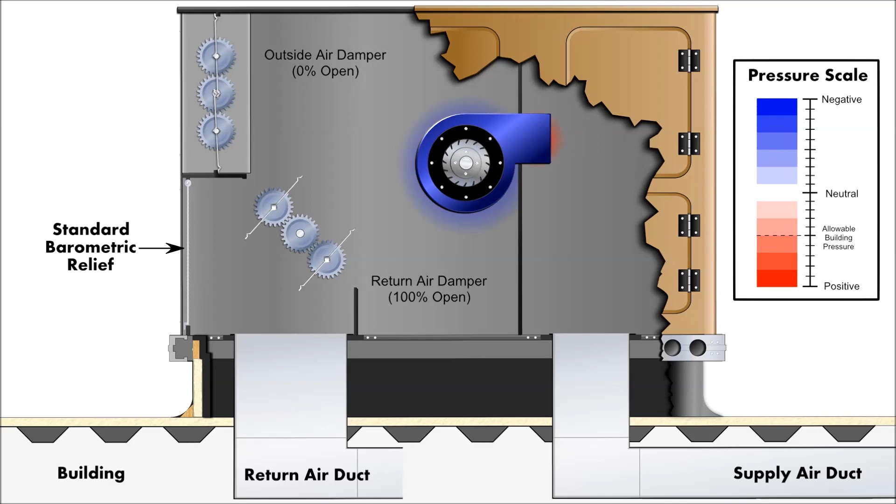To fully see this in operation, the following is a simulation of a typical rooftop with a standard economizer and integrated barometric relief dampers. As you can see, the unit starts out with the economizer outdoor air dampers fully closed and the return air damper open 100%. Also note the standard barometric shown on the left side. In putting the unit in operation, you will see the red section being supply air or positive pressure and the blue being return air or negative pressure.

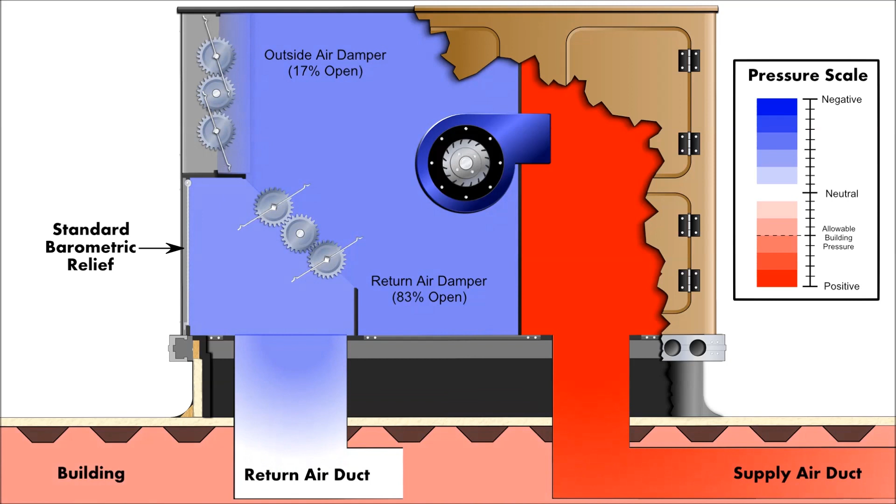At low outdoor airflows, the return air ductwork and the supply fan creates a negative pressure in the unit's relief plenum. This prevents the barometric relief damper from opening, regardless of the damper size. Today, a common solution to overcome this negative pressure is the use of an additional power exhaust device. Although power exhausts are suitable in many applications, power exhausts in general are an additional cost in both equipment and possible wire sizing. Plus, they can generate noise and waste energy.

As the economizer outdoor air damper opens and the return air damper closes, as shown here, you can see the building can become overpressurized at relatively low outdoor airflows since the relief damper has not opened yet. But as the economizer outside air damper continues to open and the return air damper continues to close, the return air duct is now sufficiently isolated from the effects of the supply fan and the pressure in the return air duct has become more positive. These changes create a positive pressure in the relief plenum, which allows the barometric relief damper to open. Again, depending on the application, barometric relief may not occur at low outdoor airflow settings.

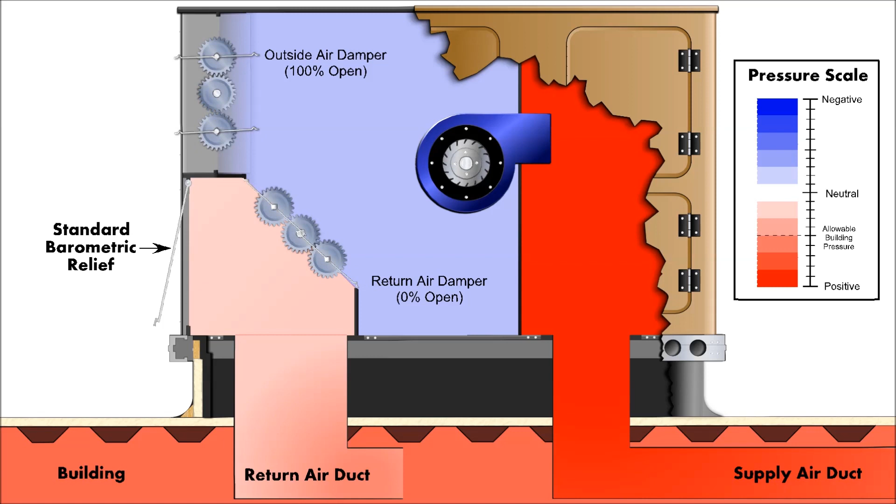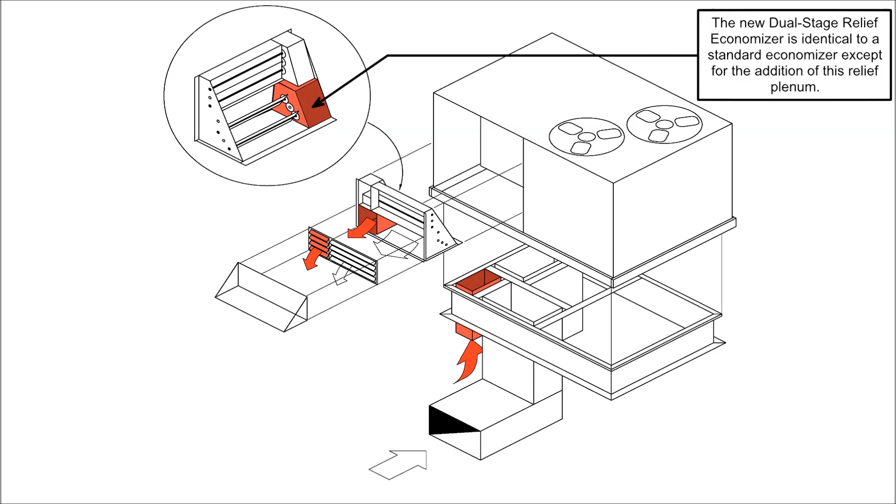To remedy this potential situation, Carrier's new dual-stage relief economizer is designed to relieve air at all economizer outdoor airflow settings, without the use of power exhausters that in general are an additional cost plus can generate noise and waste energy. This new dual-staged relief economizer is a simple yet cost-effective solution to manage relief air in a commercial rooftop unit using an economizer. The key to this new design is that one relief path or duct is completely isolated from the effects of the supply fan and return ductwork, therefore allowing relief airflow at all economizer outdoor air damper settings.

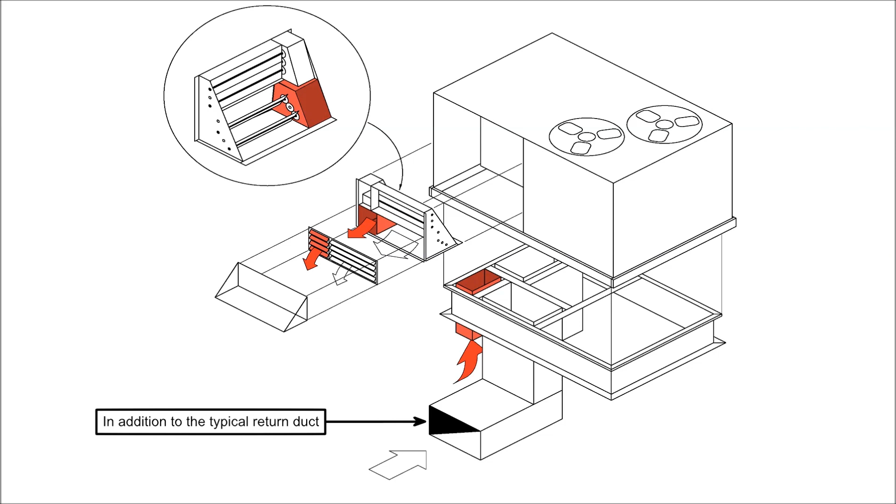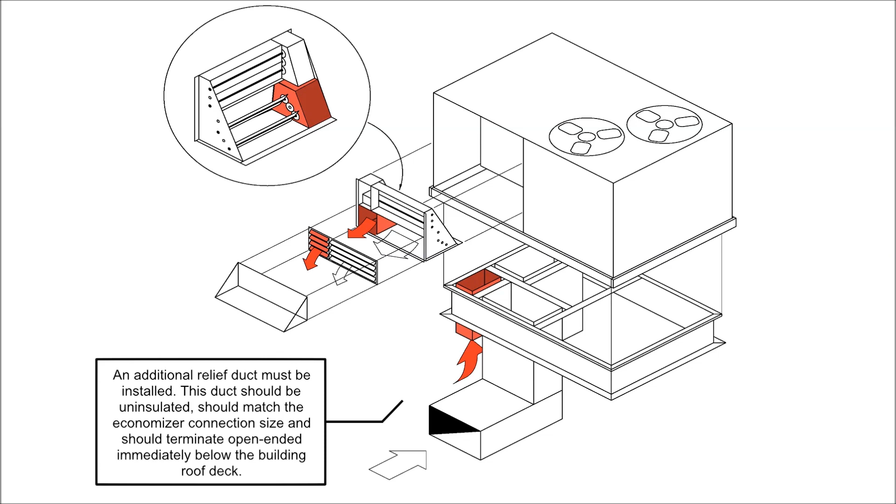In addition to the dual-stage relief economizer itself, a field fabricated and installed duct relief must be installed as shown here. This duct should be uninsulated, should match the economizer connection size, and should terminate open-ended immediately below the building roof deck. To fully see this in action, the following simulation shows how the new dual-stage relief economizer works to help relieve building pressure caused by outdoor air being brought in by an economizer.

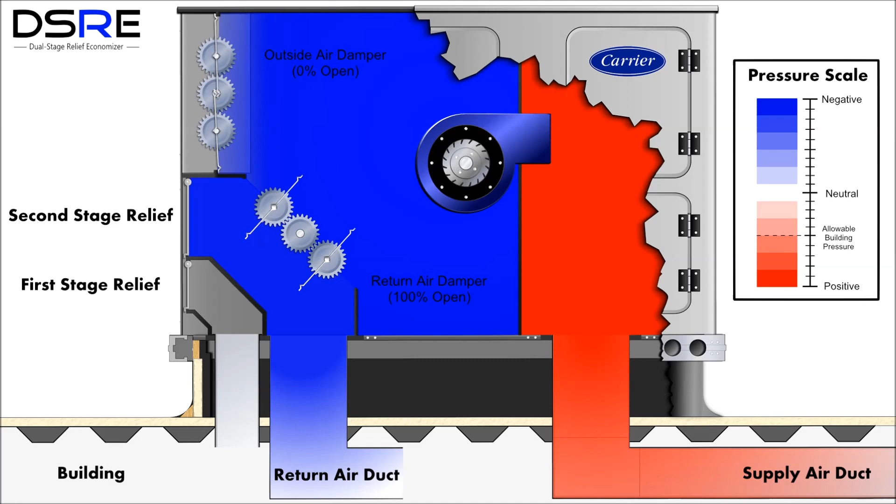The first thing you will notice is the first and second stage relief dampers shown on the left-hand side. If the second stage relief damper is unable to open due to negative pressure effects created by the supply fan and the return air ductwork, the first stage relief will open since it is not affected by these system components. As a result of the first stage relief, the economizer acts to immediately control building pressure without the use of a power exhaust. Now, unlike the unit without the dual stage relief, no matter the position of the outside air or return air dampers, the first stage relief damper allows continuous building pressure relief when needed. The second stage relief damper provides further relief at higher outdoor airflows. A simple solution for a complicated situation.

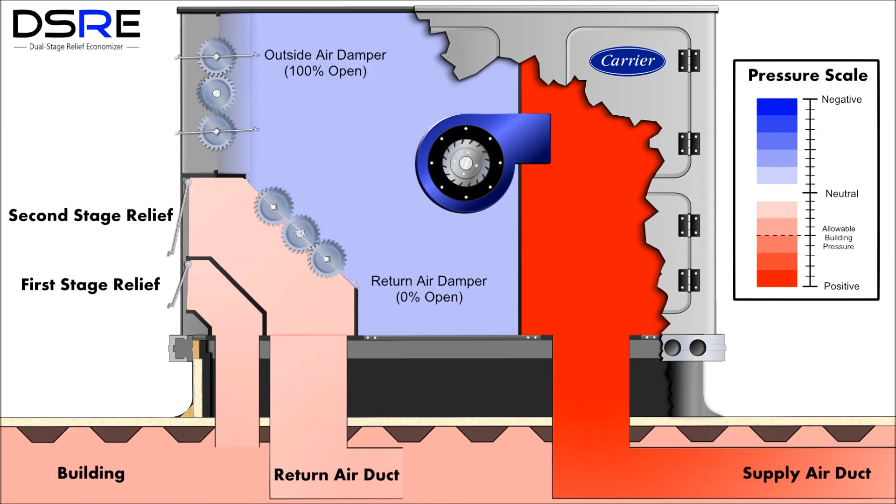As you have just seen, Carrier's new dual-stage relief economizer solves many problems that can exist when using air economizers with integrated barometric dampers in a packaged rooftop unit. This patented and exclusive offering can eliminate the need for power exhaust systems in the rooftop, which will save install costs and energy. More importantly, it will help ensure that building pressures are kept as intended.